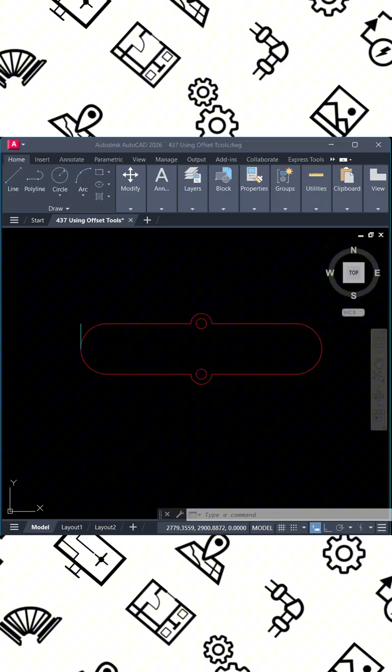Gagawa tayo ng iba't ibang klaseng pag-offset. Pero before tayo mag-start, may offset itong object na nandito sa ating drawing area. Puntahan muna natin yung Home tab. And under the layers panel, we will change it into inner layer.

Ngayon, quick refresher lang, offset is one of the most useful commands sa AutoCAD. Kasi it allows us to create parallel objects either by distance or through a specific point. And ang unang titignan natin ngayon is offset through. Kung mapapansin nyo dito, mga AutoPips, na sa left side ng drawing, may blue line tayo. Nasa outer layer siya. And as the name suggests, nasa labas siya ng shape. Ano nga bang goal natin dito?

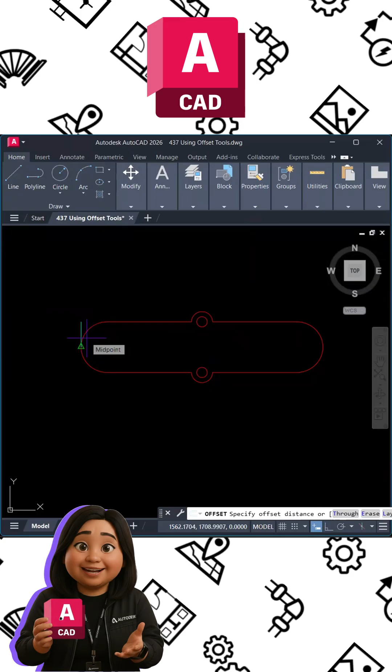Goal natin is ilipat siya sa loob ng shape at gawin siyang part ng inner geometry natin. So, ang una natin gagawin dito is dalawang bagay ng sabay. Una, offset through. Pangalawa, offset directly to the current layer, which is the inner one. So, let's do it. Una, we have to go to the Home tab. Then, under the Modify panel, this one, let's click the offset icon. As we click it, pagdating natin sa drawing area, mapapansin natin sa command line na may option for layer. This one, di ba? Pag ganyan, we can either click this or I can also right-click and select the layer. And then, let's select the current. Ibig sabihin, kahit anong i-offset ko, automatic na mapupunta siya sa current drafting layer, which is yung inner natin.

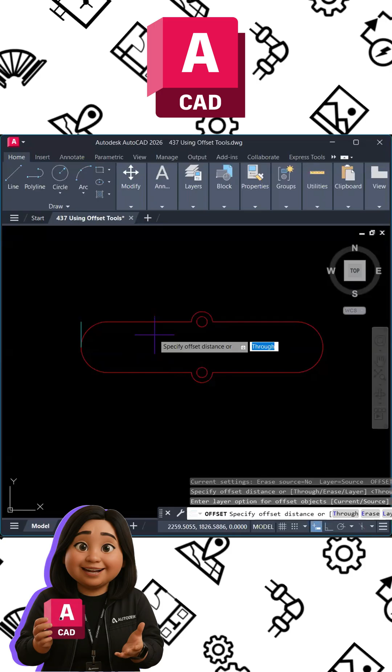Ngayon, mag-a-ask siya ng distance. So, right-click ulit. And then, piliin natin yung through. And then, select natin yung line. This one. Ang magiging through point natin is itong end point ng ating arc. Click this and then press enter. And kung mapapansin nyo, AutoPips, na-offset na siya through the point. And automatically, nasa inner layer siya.

Puntahan natin yung layers natin. And now, nasa inner layer siya automatically. Kasi sinet natin yung layer natin to current. Ngayon, di ko na kailangan ng original na blue line. And select ko lang siya. And then, let's delete it or erase this. So, malinis na. May inner line na tayo. Nasa tamang layer. Nasa tamang location.

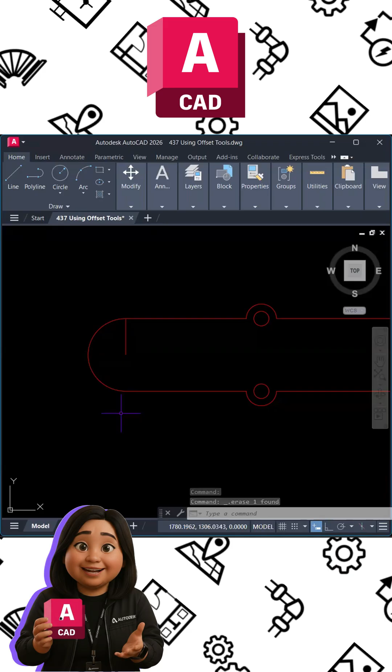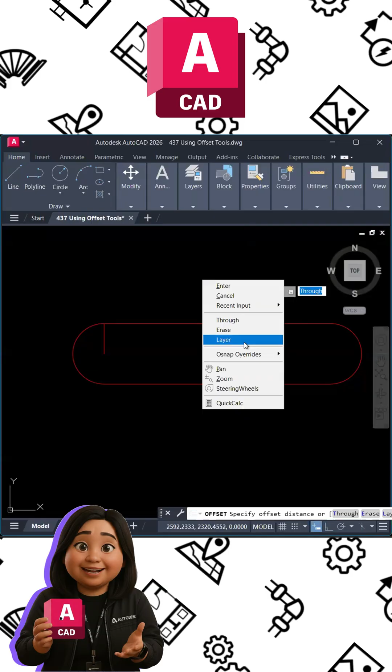Okay naman, let's try something else. Palitan natin ng current layer. Punta ulit tayo sa layers panel. And then, let's change it to outer. This one, yung blue. And then, balik tayo sa offset command natin, sa modify panel, then offset. I-right-click natin, then select ulit the layer. Make sure na nakaset pa rin tayo sa current. This time, maglalagay naman tayo ng actual distance, which is 100.

And just press enter. Ngayon, if isa-select natin yung polyline, this one, and let's move it palabas, may kita nyo yung preview na may 100 na distance. You can either move it in or outer offset. This time, gusto ko na outer offset ang gagawin natin with a distance of 100 and just simply click it and press enter to finish. So ngayon, may outer offset na tayo na nasa outer layer natin and exactly 100.

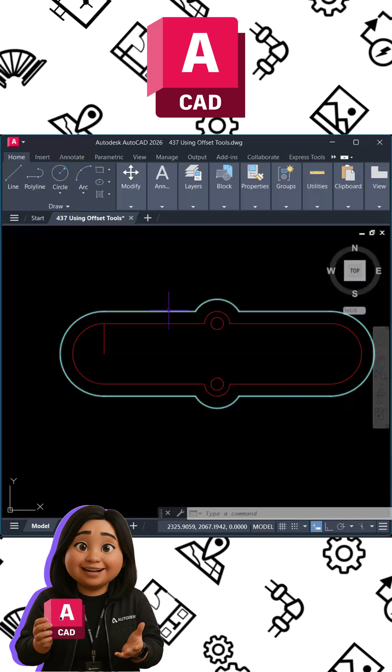Now, gawin natin ulit but this time, ibabalik natin sa source layer. So what we wanna do now is offset command ulit under the modify panel. Then let's look for offset command. And then right-click, layer, and change it to source. Distance is still 100. Naalala siya ni AutoCAD. Okay? Then press enter. Ngayon naman, select the polyline ulit and move palabas. Then click it, then enter. And just like that, layered offsets na agad.

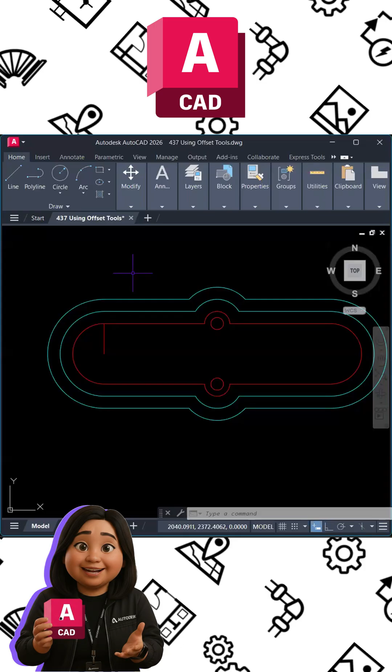Clean, controlled, and organized. Last tool na gusto kong ipakita is isa sa pinaka-underrated pero sobrang useful pagdating sa offset, which is the multiple offset. Kung titignan nyo ngayon yung drawing, parang running track na siya or maybe steps papunta sa isang plinth. Try tayo mag-zoom out ng kaunti and let's go to our offset command again under the modify panel.

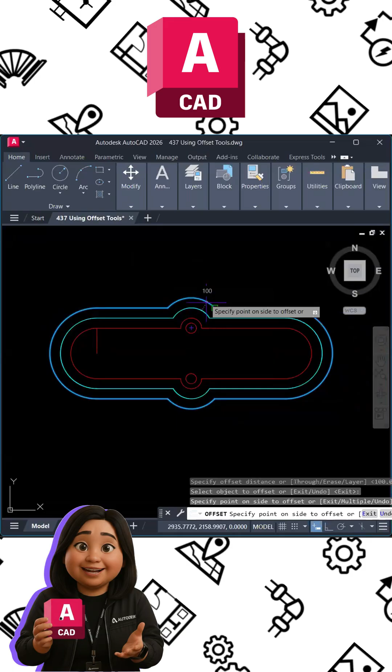Then 100 na, let's just accept it. Then let's select the outer object, this one. As we click it, right-click, and then select multiple. Ngayon, i-click it. I can also again click it with the same distance of 100. So, this is the second offset and the third offset, fourth offset. Then just press enter to finish and enter to exit. And then done.

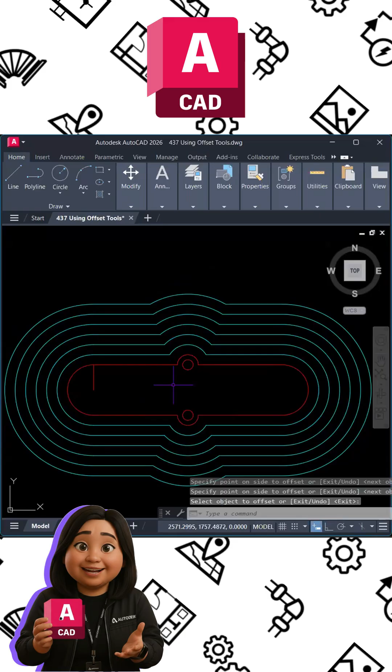Hindi lang basta offset ang offset. Kapag alam mo kung kailan gagamit ng through, kung paano i-control ang layer behavior, at kung kailan gamitin ng multiple offsets, sobrang laki ng tipid mo sa oras at effort. Mas kaunting redraw, mas kaunting erase, at mas consistent ang layers, meaning mas malinis ang drawing at mas productive ang workflow. Once again, this is Lay, your AutoCAD geek.